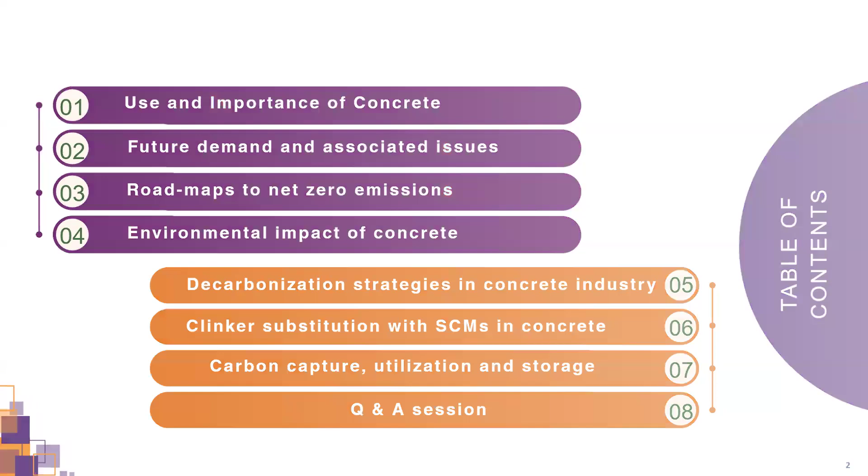So let's talk about concrete. How important is concrete for our planet? Concrete is the most abundantly used material in the world, next to water. So after water, the most consumed material in the world is concrete. Around 25 to 30 billion tons of concrete is used annually around the globe. This means that 4 metric tons of concrete for every person on this earth. And the most important ingredient of concrete is cement, whose annual production is around 4.2 billion tons, according to 2019.

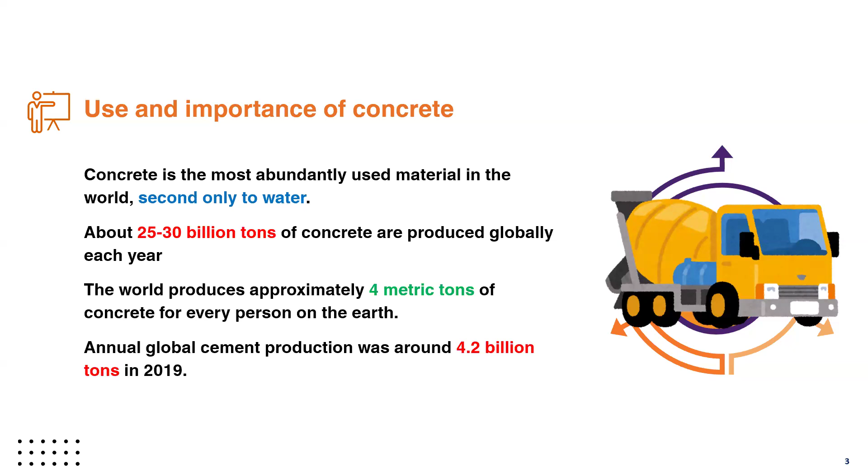So there are some very good reasons regarding the massive use of concrete. One of them is that it is very economical. Compared to all other construction materials, it is the most economical material for construction. And it's versatile, concrete can be used for many different applications. It is highly durable compared to other materials like steel and wood. It is easy to construct. And the most important thing is that the raw ingredients required for the production of concrete are available everywhere in the world.

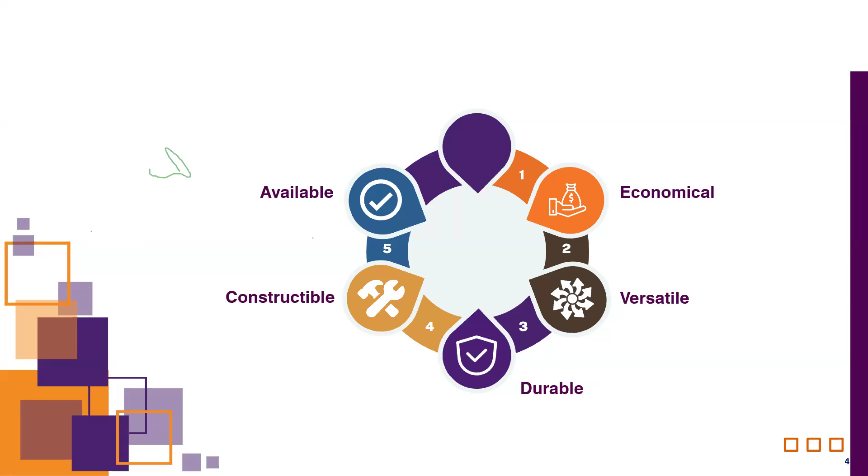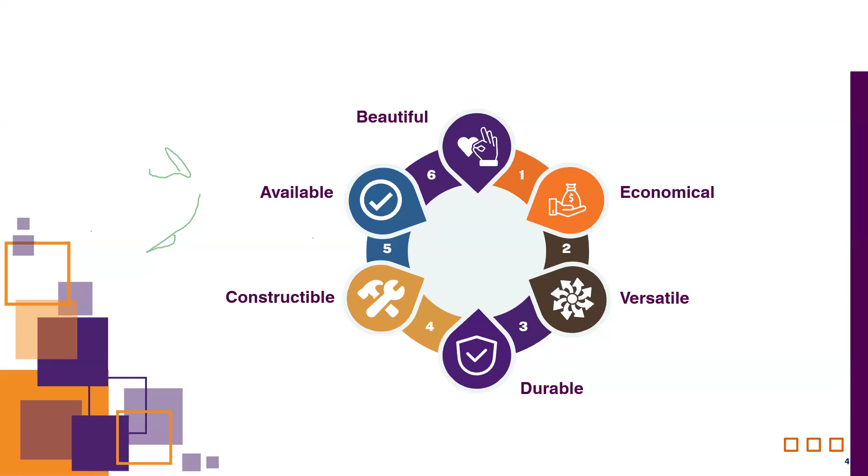And finally, we can construct very beautiful buildings and infrastructure with the help of concrete. A simple example is Dubai. The beauty of Dubai is because of the concrete. It's a desert, there is no natural beauty, but Dubai is beautiful because of the concrete.

Now we will talk about the future demands of concrete. According to estimates, by 2060, the world is projected to add 230 billion square meters of buildings. What does this mean? This means doubling the entire current global building stock. According to the estimate, this is also equivalent of adding an entire New York City to the planet every 34 days for the next 40 years. The reason for such massive demand for concrete is the rapid increase in population and urbanization.

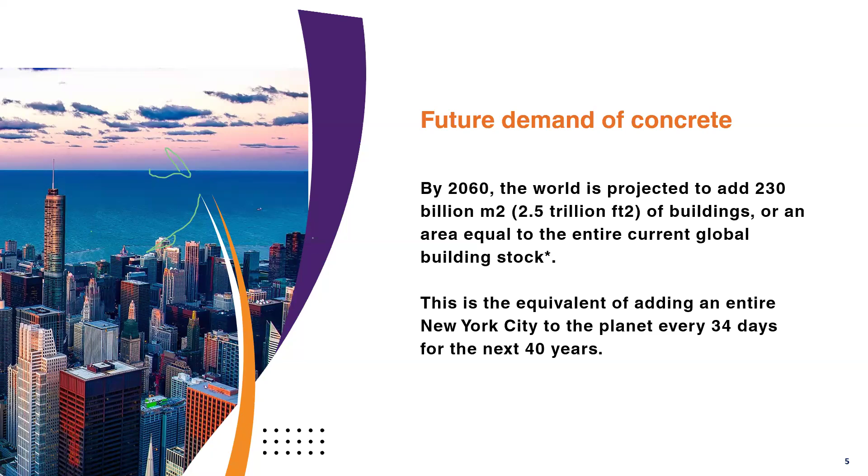Now we will talk about the environmental impact of concrete. Overall, the cement and concrete industry is responsible for 8 to 10% of the total global carbon emissions. These emissions are causing global warming and climate changes, which have serious consequences for human and natural ecosystems, in the form of fires, drought, floods. This is all because of global warming and climate changes.

According to the Paris Agreement of 2015, the world community pledged to reduce the global temperature of the world to below 2 degrees centigrade, and to keep it to 1.5 degrees centigrade above the pre-industrial levels by 2050. So this is the target, that we have to keep the global temperature below 1.5 degrees.

The problem is that these emissions are causing global warming, increasing the temperature of the earth. That's why we have to keep the temperature rise within 1.5 degrees by 2050. So the International Energy Agency has introduced a net zero roadmap, a global pathway to keep the earth's temperature within the limit of 1.5 degrees.

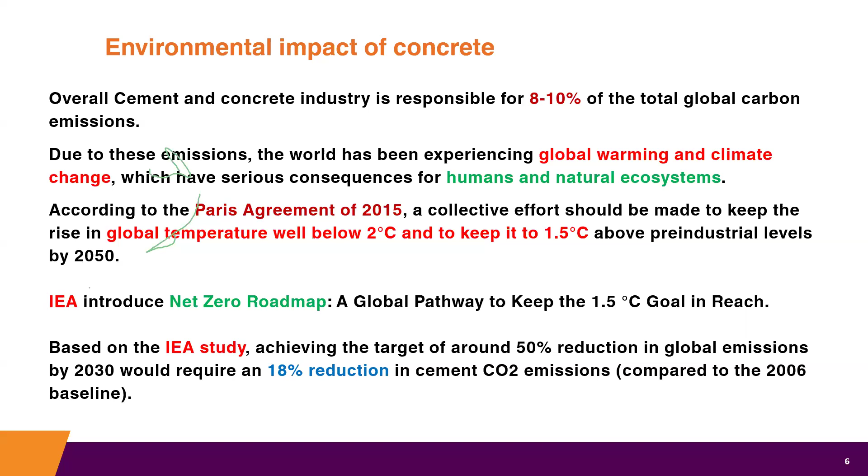In order to achieve the 2050 target, there is a very popular challenge called the Architecture 2030 Challenge. What is it? Until now, carbon emissions have been reduced by 40%. By 2025, we have to reduce by 45%, and by 2030, we have to reduce carbon emissions by 65%. Eventually, we have to make it zero emissions by 2040 in the cement and concrete industry. So this is the Architecture 2030 Challenge.

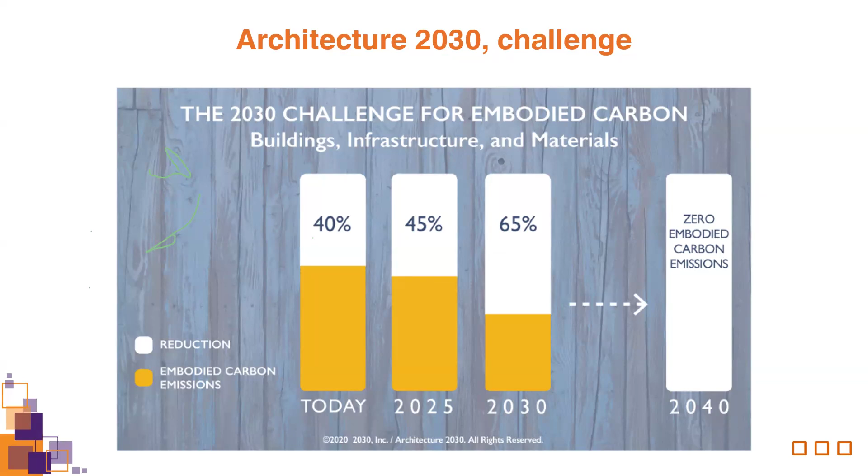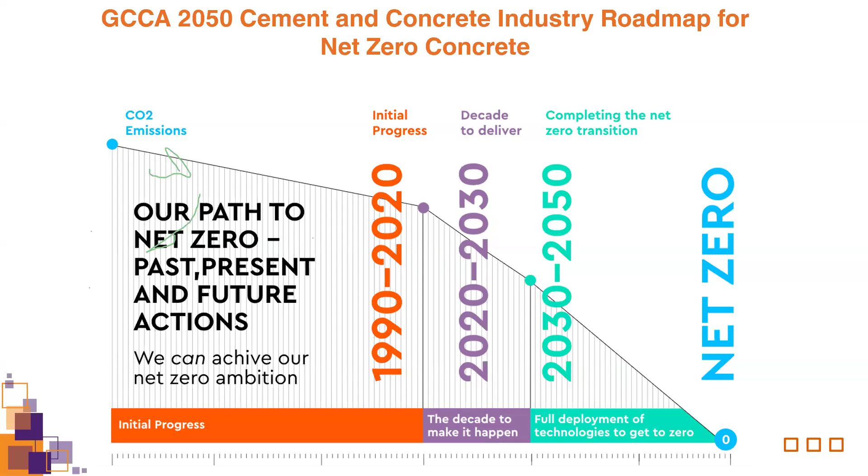Also, the Global Cement and Concrete Association has a roadmap for net zero concrete by 2050. According to that roadmap, some carbon emissions have already been reduced by adopting different technologies. But the most important decade is between 2020 and 2030, where we have to reduce significantly, and eventually achieve the net zero target between 2030 and 2050.

Before talking about the strategies required to reduce carbon emissions in the cement and concrete industry, we will first talk about understanding carbon for the building sector. There are two types of carbon associated with the building sector: one is called embodied carbon, and the other is called operational carbon.

Embodied carbon is the carbon associated with the manufacturing, transportation, and installation of construction materials. It starts from manufacturing of the raw material, transportation of the raw material, and finally installation of these raw materials, like concrete, in the form of constructing a building, roads, dams, etc. These types of emissions are called embodied emissions, which are associated with the materials.

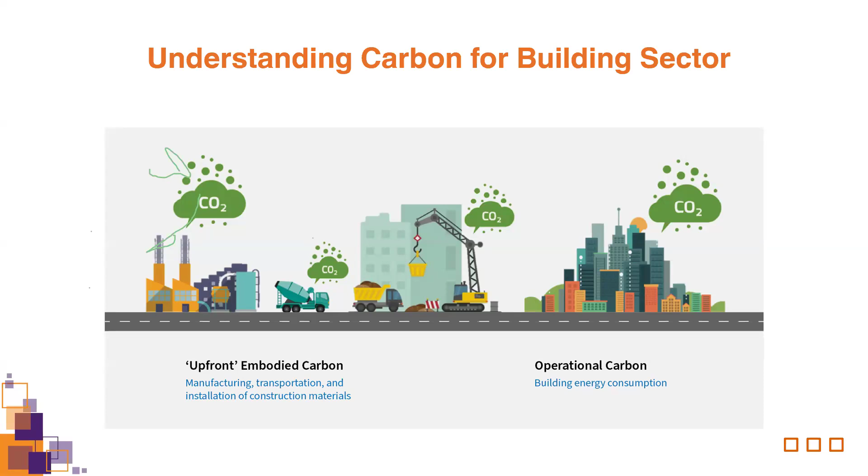And there is operational carbon. These carbons are actually related to the building's energy consumption. So the consumption after construction of the building, the emissions linked with that, is called operational carbon.

According to studies, it is expected that by 2050, 90% of the carbon associated with the building sector will be related to building materials. So 90% of the carbon will be embodied carbon, and only 10% will be operational carbon. This is the target, because a lot of low carbon energy technologies are being introduced for building operations, so we have to work to reduce the embodied environmental impact of the material used for construction of buildings.

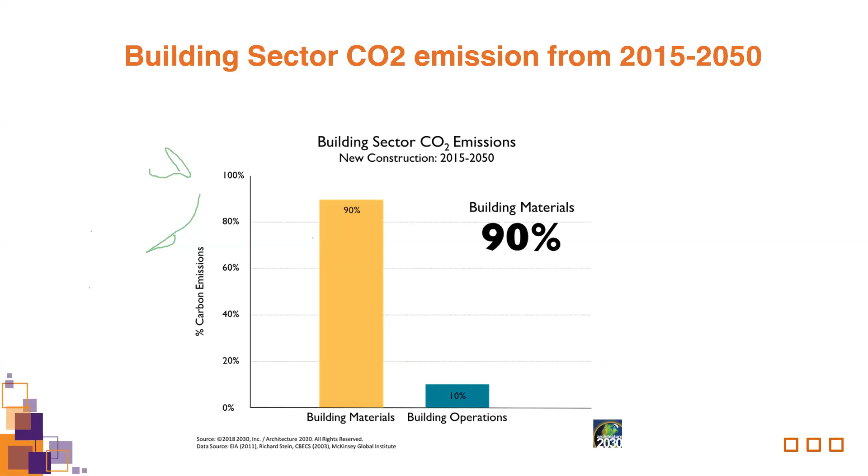But the problem is the massive use of concrete. Compared to steel and other materials, concrete use is very massive. We have already discussed it's 20 to 30 billion tons. That's why its overall impact is very huge.

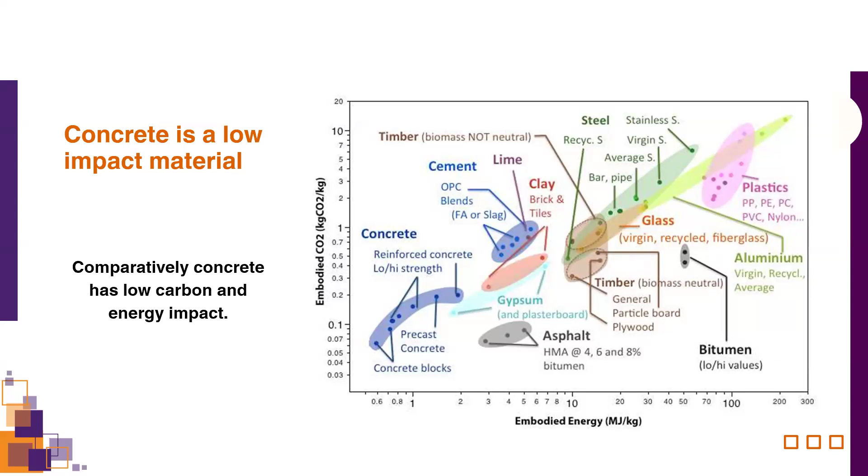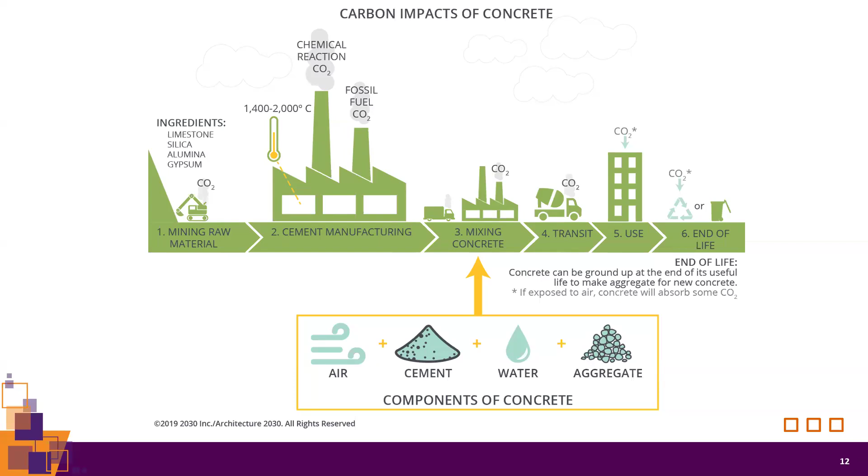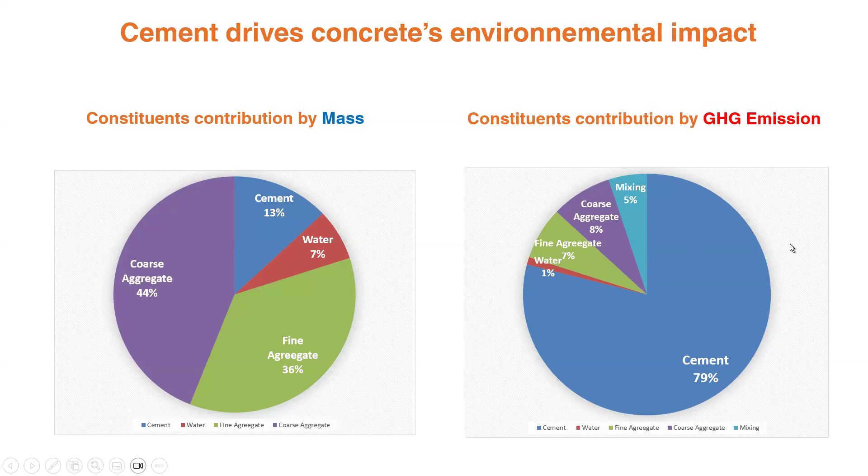This graph, on the left side, shows the percentage of different ingredients by mass. Cement is only 13% by mass of the concrete. On the right side, you can see the carbon emissions associated with different ingredients of the concrete. 79% of the carbon is associated with cement only, and the remaining 20% is from the rest of the material. So cement is the more carbon intensive material in the concrete.

So now we will talk about the decarbonization strategies in cement and concrete industry. There are basically 4 major strategies which can be used to reduce the embodied carbon impact of cement and concrete.

The first one is innovative technologies which include carbon capture, storage and utilization. The second one is the reduction of clinker to cement. The third one is fuel switching. And finally, the fourth one is thermal energy efficiency and electricity intensity.

So the first technology, carbon capture, storage and utilization, can reduce carbon emission by 56%. Clinker reduction, by replacing it with supplementary cementitious material, can reduce carbon emission by 37%.

Fuel switching means using renewable energy sources instead of coal or crude oil. If we switch to more renewable fuel options, we can reduce up to 15%. And finally, by optimizing the thermal efficiency of the cement kiln and electric intensity, we can reduce 10% of the carbon.

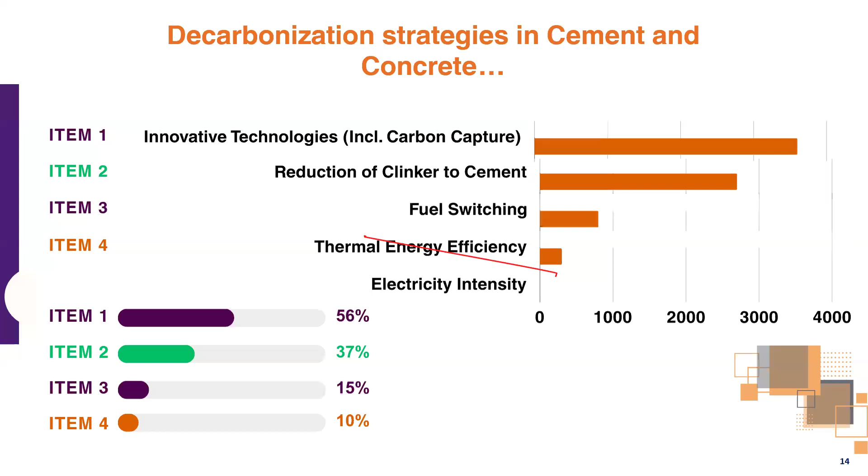First of all, I will talk about clinker substitution with supplementary cementitious material. There are many binders which can be used as supplementary cementitious material by different percentages in concrete. The composition, performance and availability of these materials varies significantly.

Portland cement is the most commonly used material for the production of concrete. We have natural pozzolans like volcanic ash, volcanic pumice, zeolite. These materials have potential to replace cement by some percentage.

There is calcined clay. Calcined clay is when you heat kaolinite clay at high temperatures, so it becomes amorphous and can be used as an SCM in concrete.

Then the most popular one is fly ash, which is the byproduct of coal thermal plants. We have granulated slag, blast furnace slag, which is the byproduct of the steel industry. And there is glass - if we grind the glass into powder, we can also use it as a supplementary cementitious material.

And there are so many other materials - agricultural waste, and many other industrial waste materials - that can be used as a binder, especially as a cement replacement in concrete.

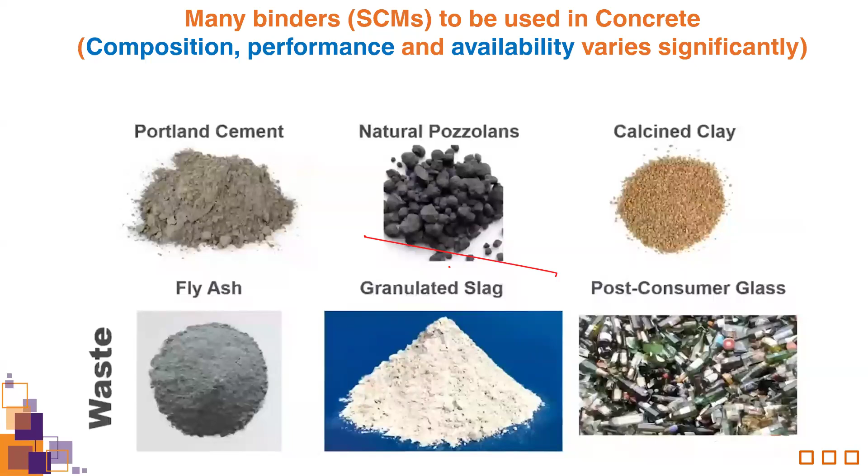So the problem is that clinker is producing a lot of emissions. If we replace clinker by some percentage with materials which have low embodied carbon, we are actually reducing the emissions of the concrete.

All these materials are currently in use by some percentages as a replacement of cement. We have 2 new materials nowadays which are more commonly used.

One is the filler - actually it's limestone, powdered limestone, used as a filler by 10 to 15%. And then we have calcined clay, which is available in huge quantity everywhere in the world. This is the most potential material, which can be used as a replacement of up to 50% of cement.

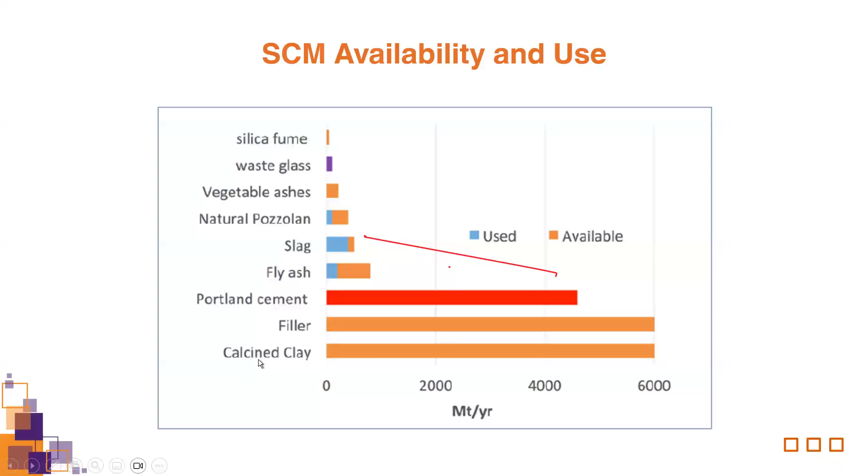So actually today, on average, only around 20% of SCMs are used as a substitute to Portland cement in concrete.

And there is actually a problem associated with the most popular slag and fly ash, which is the availability of adequate quality material - fly ash and GGBS is now limited. There is also a supply and demand issue because of the global shift from coal thermal plants to renewable energy resources, and also from ground granulated blast furnace slag to electric arc furnace slag. Because of this shift, there is an issue with the supply and demand of both fly ash and GGBS.

And there is another issue. Actually, in most concrete applications, especially high performance applications, there is a limit on clinker substitution, which is associated with the adequate strength gain at early age.

So if we replace these pozzolans at high percentages, there will be a problem in the early age strength of the concrete, which is required in some cases. Otherwise, it will delay construction timelines, and there will be other issues also.

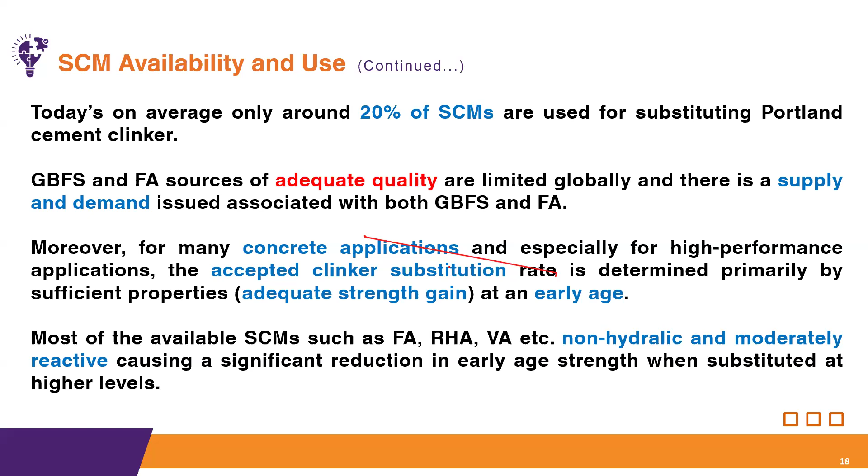So the target is to replace cement by 50%. This is the target in order to achieve the IEA roadmap. So you can see the calcined clay, which is also called metakaolin. The commercial name of this material is metakaolin. And limestone calcined clay cement, another type of cement called LC3, are best fit for replacing 50% of the cement while also maintaining better performance.

There is another option, which is the coupled SCM system. What is this? It is a combination of conventional SCMs, which are moderately reactive, with highly reactive SCM like metakaolin, micro and nanosilica. If we use these together, we can replace the clinker by a high amount, up to 50%, without compromising on strength and durability performance. So this promising technology of coupled SCM system would pave the path for high clinker substitution and ultimately result in the development of stronger, sustainable, and long-lasting concrete.

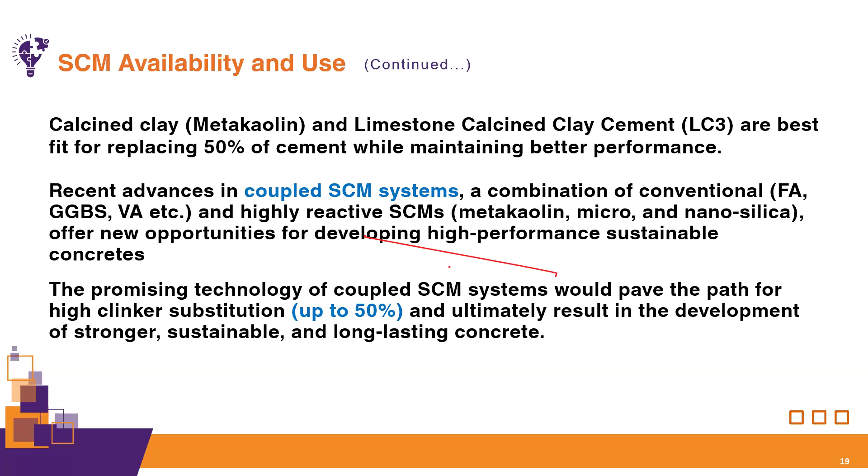Another option is high strength concrete. If we use high and ultra high strength concrete for our application, there is a benefit: if concrete is stronger, less of it will be needed, so we will need less material. Also, it will be more durable, so the structure will last longer. So using high strength concrete grades, we can reduce the overall consumption of material.

And in case of high strength concrete, there will be a lower steel quantity required. So ultimately, the overall embodied carbon impact of our structure will be reduced.

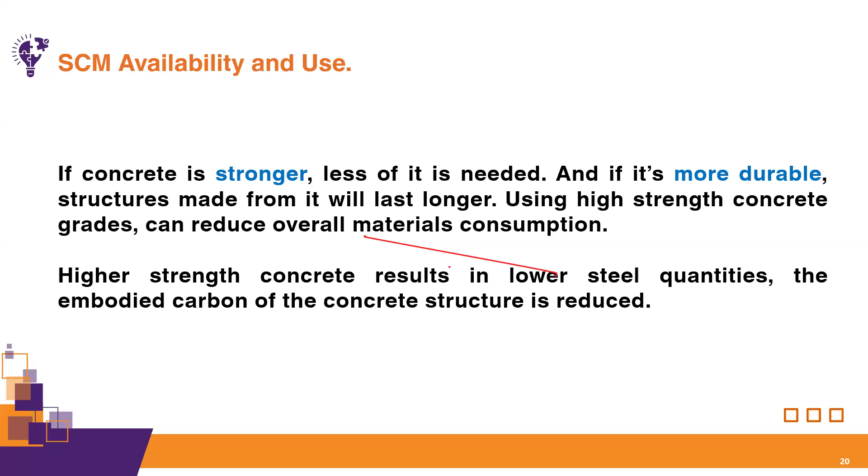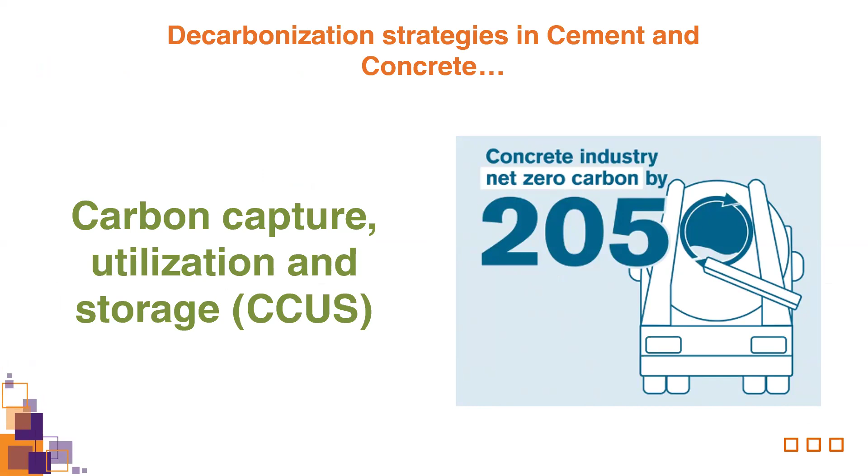Now I will talk about a more innovative technology, which is called carbon capture, utilization, and storage. This technology is very innovative. There is a lot of research nowadays going on, but still it's not very developed and it's very costly. So we will talk about what this technology is and how it will reduce carbon emissions in the future.

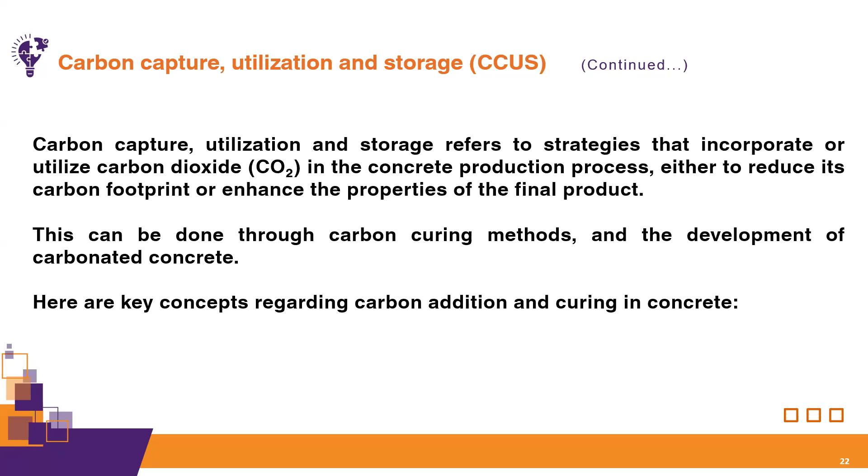So carbon capture, utilization, and storage refers to strategies that incorporate or utilize carbon dioxide in the concrete production process, either to reduce its carbon footprint or enhance the properties of the final product. This can be done through carbon curing methods and development of carbonated concrete. So the key concepts regarding carbon addition and curing in concrete are discussed in this slide.

First of all, we can use carbon for curing purposes. The carbon which is actually emitted from the cement plant or any industry, if we capture that carbon and then utilize it for curing purposes, instead of water curing, if we cure our concrete within a carbon environment, this is called carbonation curing, also called enforced curing. So carbonation curing is a method in which carbon dioxide is intentionally added to the curing process of the concrete.

So what will happen when we cure our concrete under a carbon environment? When concrete is exposed to carbon during curing, a chemical reaction occurs between CO2 and the calcium hydroxide, which is one of the major products of the hydration reaction in concrete. When carbon reacts with calcium hydroxide, calcium carbonate will form, and this is a very stable compound, and it will increase the initial strength of the concrete because of the formation of calcium carbonate.

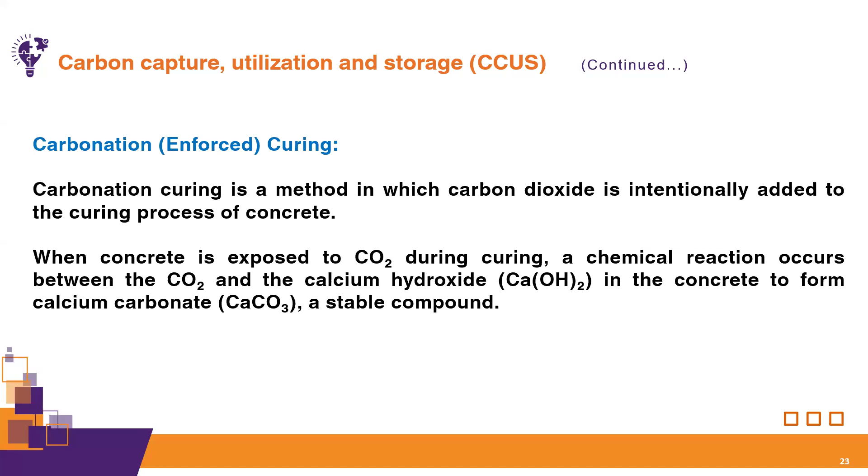So what are the benefits of carbonation curing? It will enhance the early age strength. If we compare concrete cured under a carbon environment versus under water, the 1 day strength of the concrete cured under carbon environment will be more than the water cured concrete. This is because of the carbonation reaction and the formation of CaCO3.

The second benefit is that we can sequester carbon dioxide in the concrete. Carbon will be absorbed by the concrete and it will be there over its lifetime. One of the major issues nowadays is how to store carbon, so we can easily store carbon by this method in the concrete. It will be there until the concrete is there. If we break the concrete and reuse it, then the carbon maybe can be emitted again, but while the concrete is there, the carbon will be there in the concrete.

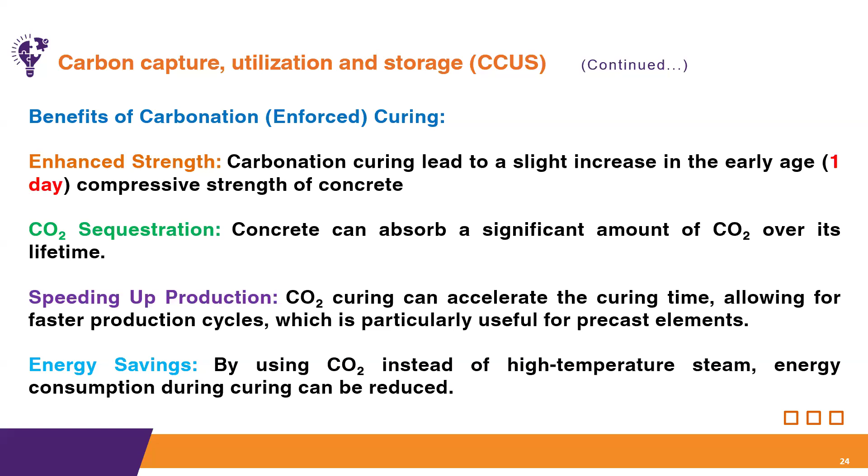Another way of utilizing carbon in concrete is by adding carbon dioxide into the concrete mix during the mixing phase. The amount is very small, 0.2 to 0.5%, depending on the type of concrete.

This carbon will react with the calcium present in the cement, and it will ultimately form calcium carbonate again. This method helps bind some of the carbon within the concrete itself, reduces emissions by utilizing the carbon, and gives slightly higher strength.

We can also reduce some of the cement amount from the concrete with no compromise on strength gain. Using this method, we can reduce the amount of cement by about 5 to 10% and still get the same strength.

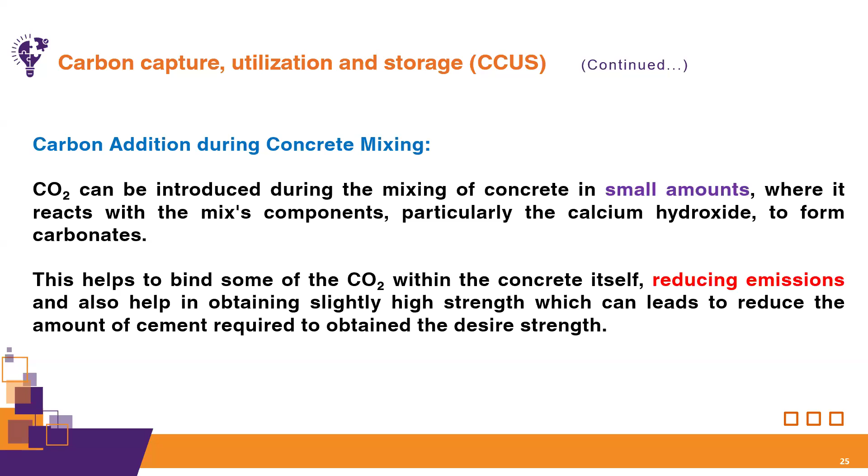Now, what are the challenges and considerations? There are a lot of challenges in adopting this technology, especially carbon capturing, utilization, and storage. One of the challenges is the carbonation limit.

The carbonation process can only penetrate a certain depth. So if we cure our concrete in the curing environment, the carbon can penetrate only up to a certain depth, which limits its effectiveness in large structures.

The second limitation is control of carbon in curing. Ensuring the right amount of carbon dioxide is introduced at the correct temperature and pressure during curing is critical for maximizing the benefit.

Overexposure or insufficient carbon could lead to negative results. That's why it's very important to optimize the carbon amount, temperature, and pressure at which carbon is inserted or used for curing purposes.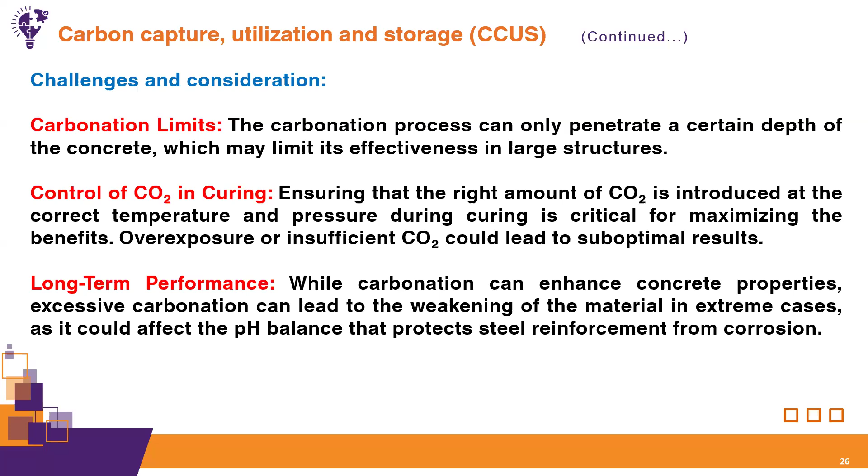That's why it's very important to evaluate the long-term performance of both these techniques so that there are no corrosion-related issues with steel reinforcement.

Now examples of carbon addition and curing innovation. There are a lot of companies nowadays working on these technologies. The most popular and famous company is CarbonCure. They are utilizing carbon by injecting it inside the concrete mix.

They are actually using this carbon in the ready-mix industry. There is also Carbon Clean Technology, another company.

They have a lot of pilot projects focusing on utilizing carbon to produce carbonated concrete blocks and precast elements. Also, Saudi Aramco is working on some pilot projects focused on carbon curing of concrete blocks and precast elements.

There is also a company called Solidia Technologies, a US based company. They have developed a cement called Solidia cement, which reacts with carbon dioxide in the presence of moisture.

It only needs 1 day of curing. The specialty of this cement is that it doesn't react with water, it reacts with carbon, and to get the maximum strength it just needs 1 day of curing. The performance of the concrete is much better than conventional concrete. This is their patented product, and it is now available in the market.

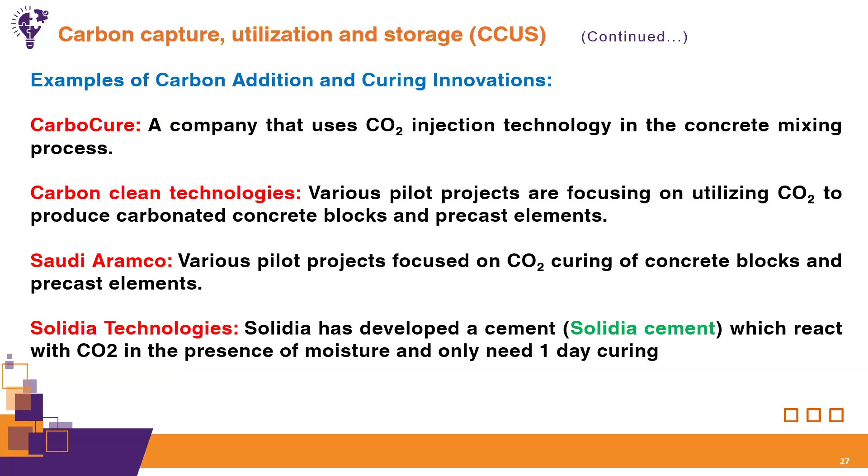In conclusion, regarding the different technologies that can reduce the overall environmental impact of cement and concrete, according to the IEA International Energy Agency roadmap, among the 4 different strategies, the most important, practical, well-established, and conveniently implementable for the ready-mix industry is clinker reduction by introducing emerging SCMs. This is the most easily implementable way to reduce carbon emissions from the cement and concrete industry.

The second is optimized and effective utilization of cement in concrete production. According to the IEA, these two areas have significant potential for reducing cement industry carbon emissions over the next 20 to 30 years.

So these 2 technologies can play a very important role in the next 20-30 years to reduce the carbon emission from the cement and concrete industry. The problem with carbon capturing, storage, and utilization technology is that it is very expensive and not yet developed. Once it is developed and if it is economical, the impact of this technology will be huge, but still a lot of research is required to further make this technology economical and optimized.